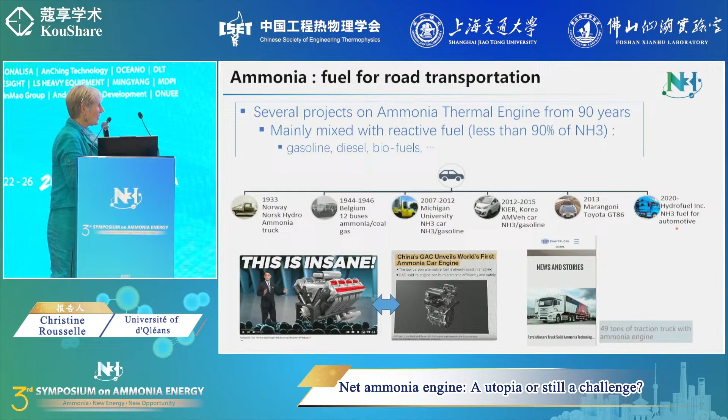I've seen also during the industrial academic workshop that there is a beautiful example for this joint research in order to develop 49 tons of traction trucks with ammonia engine. So it's still, we have still the idea perhaps to run vehicles with ammonia only.

Most of you know that from the announcement on the IMO roadmap in order to decarbonize the maritime sector, there is a lot of impressive work about ammonia marine engine. And in 2021, there is an example of what we can imagine for the future on the sea. The ships will be fueled with a different type of fuel like ethanol, LPG, methanol, hydrogen, LNG, biofuel, and ammonia.

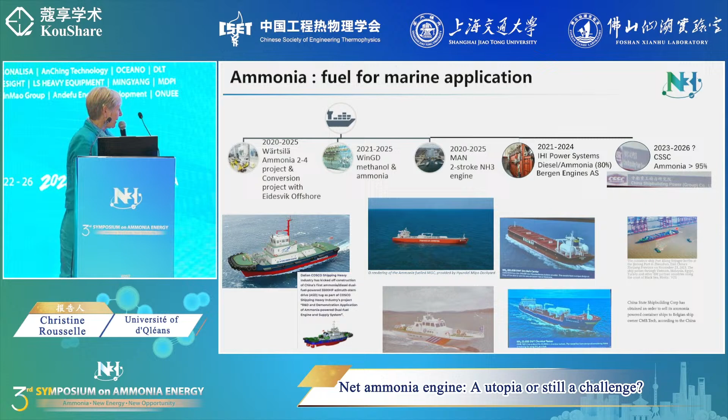So now there is plenty of industrial projects in order to develop marine ammonia engines. Wärtsilä, WinGD, MAN, IHI recently, and also Monday I listened to this new project with a CSSC manufacturer. So perhaps also we will see soon some ships with a marine engine fueled with ammonia.

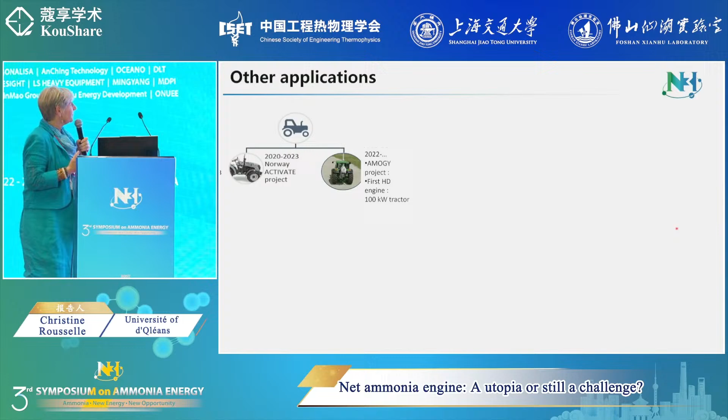There are some other applications like tractor. There are not so many. I know only two, one project between Norway and Poland. But also there are interesting new announcements about, for example, power trains with ammonia engines. So there is two examples.

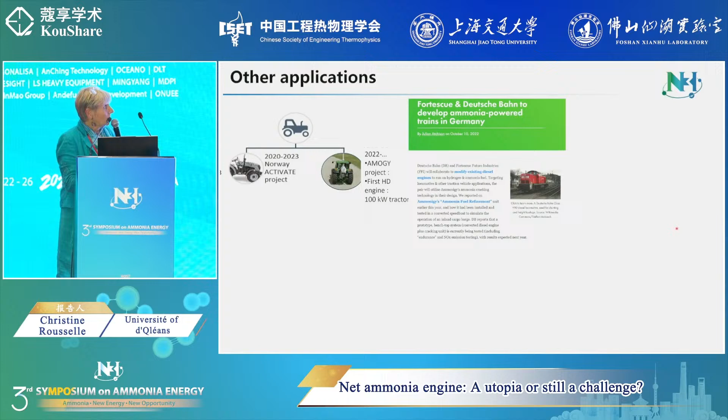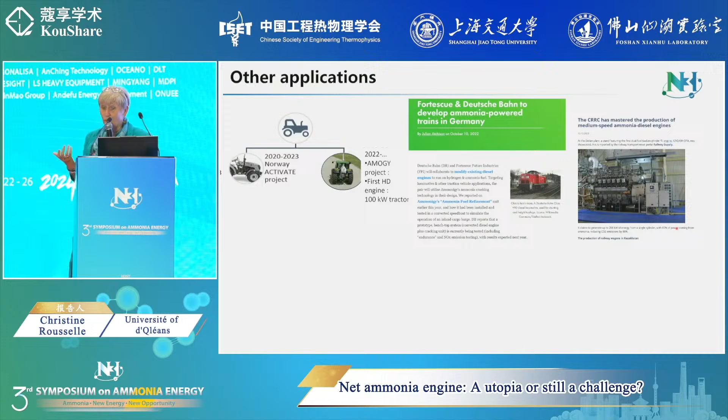Why? Because it is not possible to totally electrify trains everywhere on our planet. So there are other possible applications where there is engine like genset, auxiliary power unit, off-road vehicles like construction, mining, port, cranes, and so on. And I am confident that it could be a very nice and well-optimized application for ammonia engine.

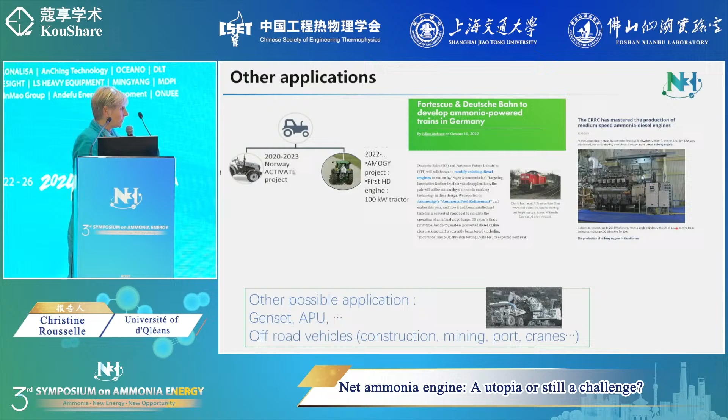We can dream, so why not for aircraft? And here there are also some projects, not a lot. There are some recent projects for a small company in Australia to develop an ammonia Falcon business engine. But also there is a big project with Boeing. It started at University of Florida, SWRI, and NASA about how we can use ammonia in engine.

Most of the time, in fact, they use ammonia as energy carrier and they will crack it on board.

Most of you, even if you are not in the combustion community, know that ammonia is not a good fuel, and it's not a good fuel for internal combustion engine. It is quite inert. The flammability limits are very narrow. It has a slow flame propagation. And also, it's a fuel-bound nitrogen, so we will have some trouble with pollutant emission.

So why do we want to use ammonia in engine? The question remains: is it possible or not possible?

In fact, we are going to the past. So during the 60s, there were several studies financed by the US Army in order to see the potential of ammonia as fuel.

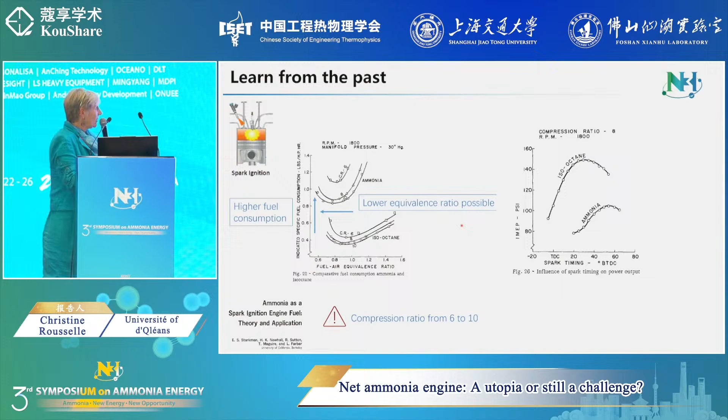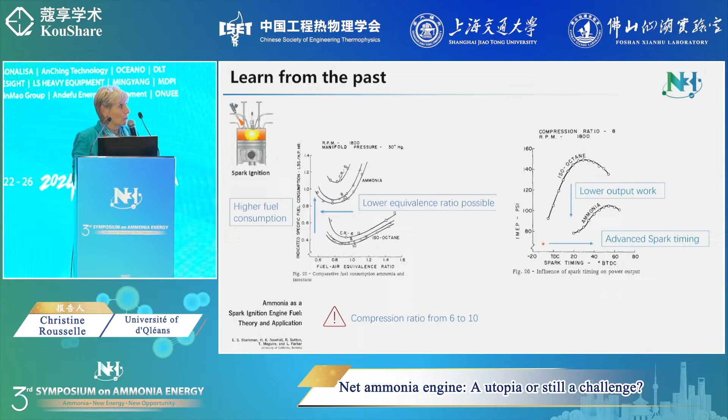If we look now on the energy output that we can have from the engines, unfortunately, the study showed lower output of work, higher fuel consumption, and also it needs advanced spark timing due to the low flame velocity.

Okay, what's about compression in an engine? Oh no, not yet, sorry.

So in fact, from this study, they conclude that we need to increase the spark energy, we need to increase compression ratio, engine supercharging, and hydrogen addition. So it was a long time ago already.

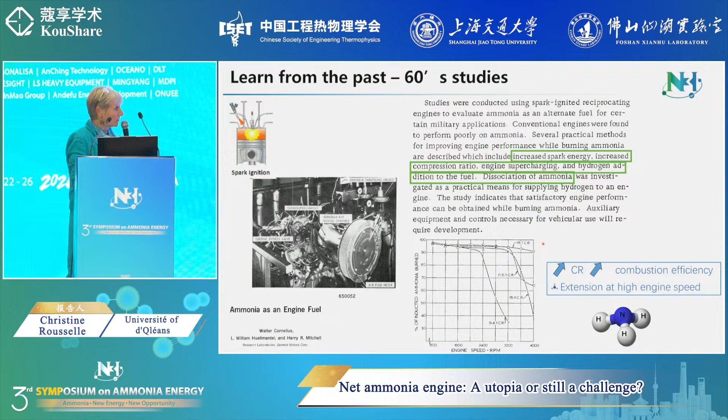And so finally, they said that, sure, we need to increase the compression ratio because we increase the combustion efficiency, and we can extend the use of ammonia at high engine speed.

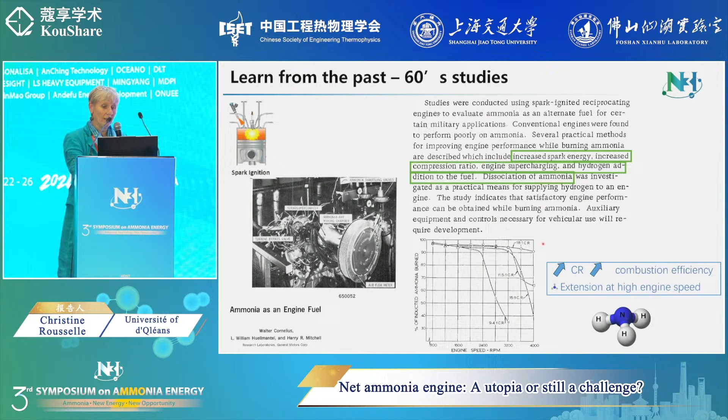So there is more recently a patent where they conclude exactly the same thing: we need hydrogen to assist ammonia.

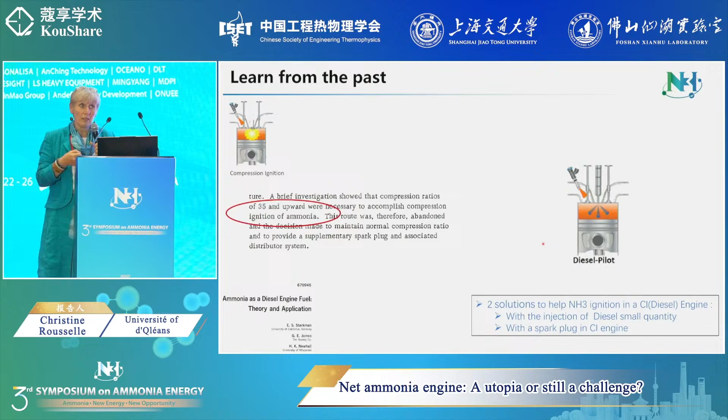About compression ignition engines, it was worse because we concluded that we need a compression ratio of 35 to obtain auto ignition of ammonia. So it's clear if we want to retrofit a diesel engine with ammonia, there aren't many solutions, but we need to do something, so we can use ignition by a small quantity of diesel pilot fuel, or add a spark plug in the diesel engine.

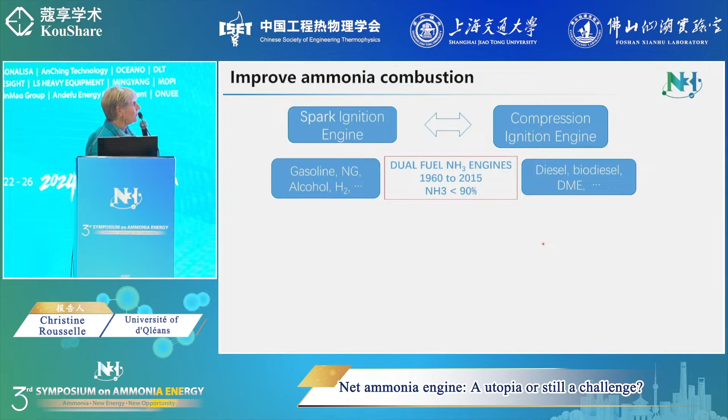If we look at what happened between the 60s and 2015, there wasn't much research, some vehicles, and what we can conclude is it was always a dual fuel engine. Most of the time, 50-50%, no more quantity of ammonia mixed with gasoline, natural gas, alcohol, hydrogen sometimes, but not a lot, diesel, biodiesel, DME, whatever we want.

We now have a good problem, a new problem: we want to reduce our carbon footprint as much as possible. So the question remains, how can we reach zero carbon footprint with an ammonia engine if we continue to use, in fact, hydrocarbon fuels?

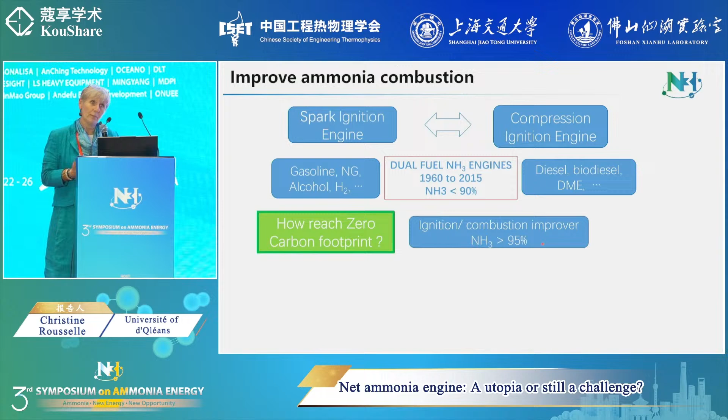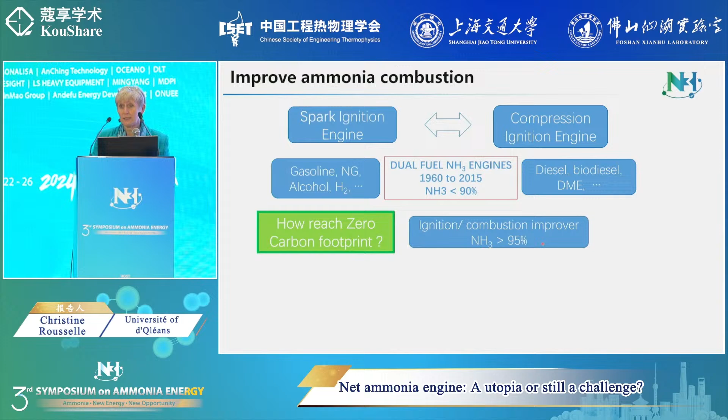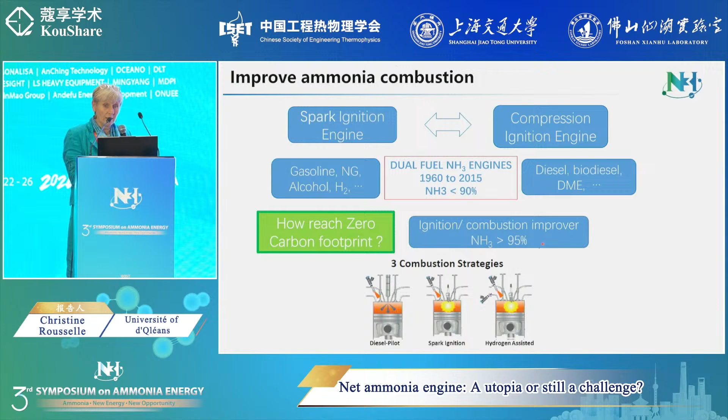Unfortunately, we know we need something, an ignition combustion improver. So I will consider mainly ammonia engines when we can use and guarantee operating conditions with at least 95% of ammonia. For that, we can use a classical spark ignition engine with high compression, hydrogen, and so on. Or we can use a diesel type engine, but we need a small pilot of diesel type fuel, or hydrogen, or spark plug additions.

So first we started with a current engine, with our partner Peugeot. We used a current spark ignition engine, but a single cylinder engine, gasoline direct injection, but using fully premixed ammonia-air. It was a very classical compression ratio, 10.5, so not very high. This is what happened when we started testing it.

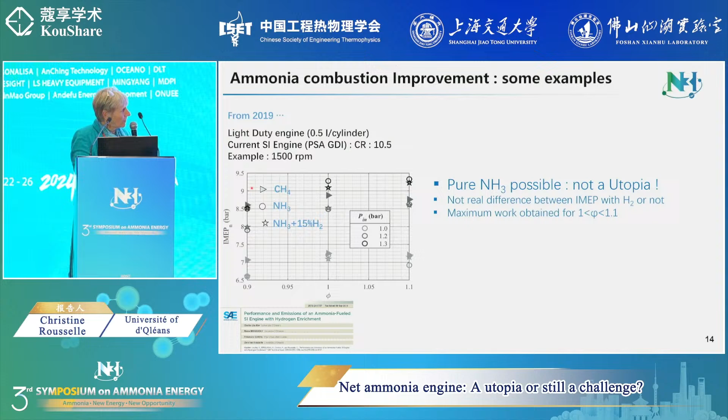I can say first that it is not really utopia to run with pure ammonia. But when I want to change the load and the engine speed, it's not the same story. We can see that in red, I cannot ignite, and I need to add hydrogen. There is no other way to do it.

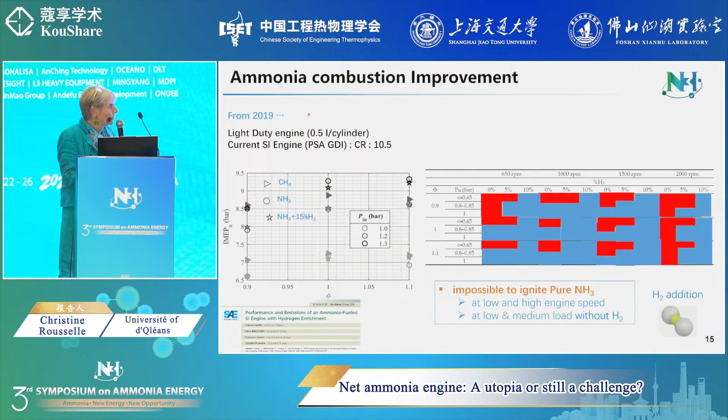But there are some new studies recently. When they use a higher compression ratio, 15, they try to see if it's possible to improve ammonia ignition only by using a very high efficiency ignition system device. For that, they use high current energy, for example a spark plug with high energy, or a spark plug with multiple sparks. We can see that with a high energy spark plug, we strongly increase the efficiency of the engine and can run with leaner conditions. They also changed the ignition system, the transistor coil, and also obtained an increase in efficiency.

Perhaps it's sufficient, and also they can run at a lower equivalence ratio, meaning not full load, but lower load.

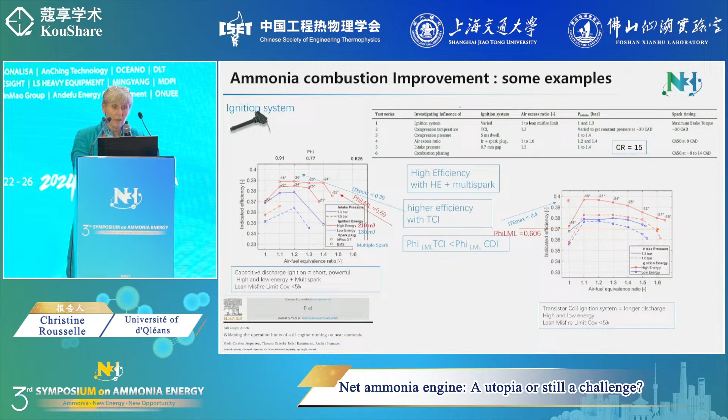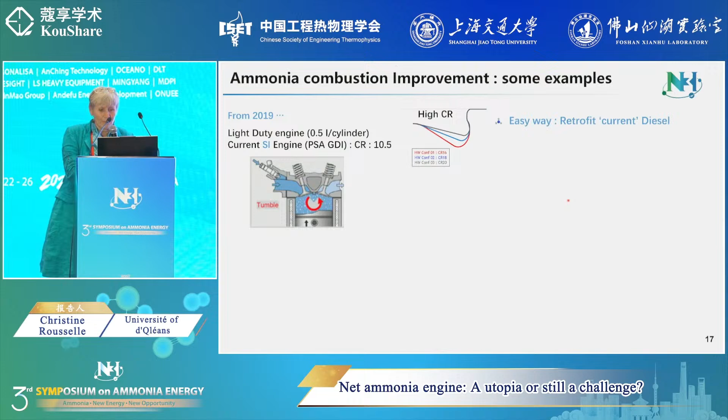We decided first to try to see what happens at different compression ratios, but unfortunately we only had a diesel engine. So the easy way is to use a diesel engine and add a spark plug. Most people here doing engine research say I am totally crazy, because we can see the difference between both engines. In a spark ignition engine, I have a flow that creates a lot of turbulence to enhance the flame and combustion development. In the diesel engine, I have a flow with nothing about turbulence, and normally it cannot work with a fuel like ammonia.

When I try to compare what happens with a spark ignition engine: we change the compression ratio a little, but that's not important here. What is important is that when I increase hydrogen content, I can run easily with a lot of stability at low load, which is very nice. That is my objective for the moment.

But when I use my diesel engine with a spark plug and change the compression ratio, I can reach really lower load. So, in fact, it is a success. This is totally strange, because the turbulence inside my combustion chamber is really not suited for fuel-air premixing. What I want to say is, be careful when we only use simulation, CFD modeling, and say 'okay, I have one engine like that, I replace gasoline by ammonia' - it's not the truth, because until now turbulent flame interaction in the case of ammonia is not well understood and cannot be well modeled.

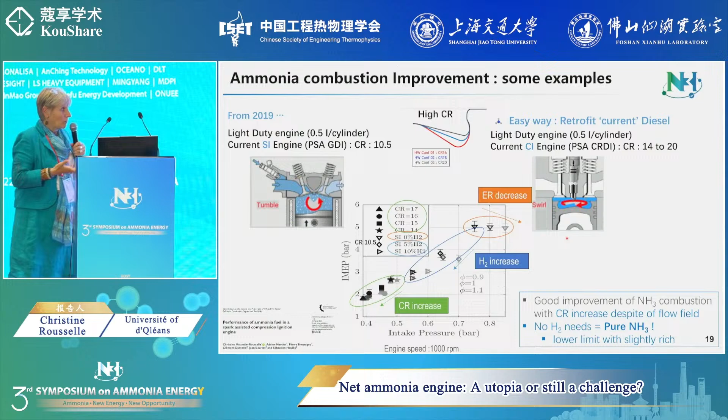So what we conclude is, in fact, yes, we don't need hydrogen. We need high compression ratio because we can reach a very lower limit without any problem. And this lower limit was similar to one study of Toyota when we enrich their engine with hydrogen.

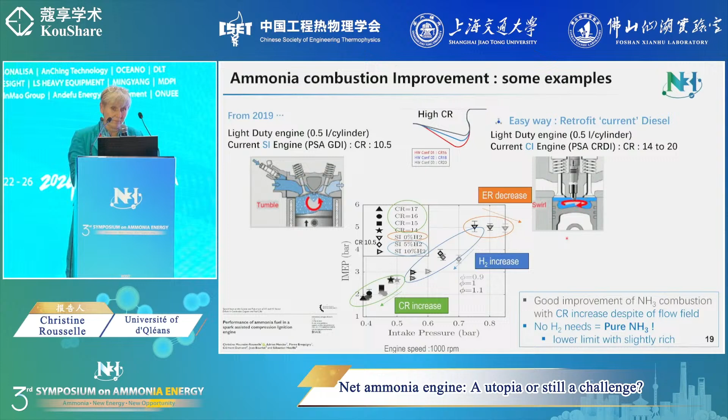Another way also is to improve the ignition system itself. So we did this by only using a high power igniter. And this high power igniter, in fact, the conclusion is that I don't need so high a compression ratio. I can limit it a little bit.

There is another way, the pre-chamber ignition. The pre-chamber ignition is also a good example of how we can improve the ignition of the engine because it provides higher ignition energy and increases locally the turbulence. And we can have less global hydrogen consumption if we fill the igniter with hydrogen.

But don't forget, my idea is to have only one fuel, which is ammonia. So how can we use a pre-chamber igniter with ammonia only? Which remains one open question.

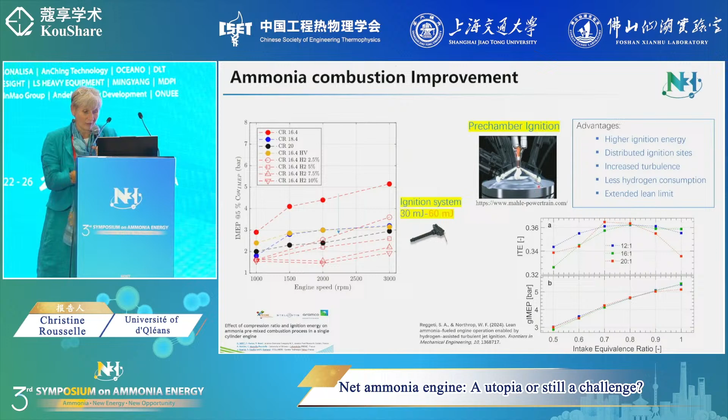So certainly I've convinced you that higher compression ratio, perhaps with some addition of hydrogen if we want to cover the full operating conditions, with optimized ignition, is the ideal solution.

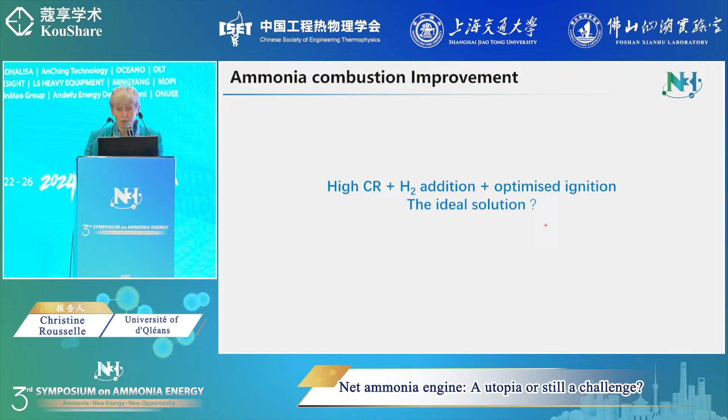But it is not so simple. In fact, some other problems remain, like how we will inject ammonia: gaseous or liquid ammonia injection. Gaseous could be nice, but for that we also need a vaporizer.

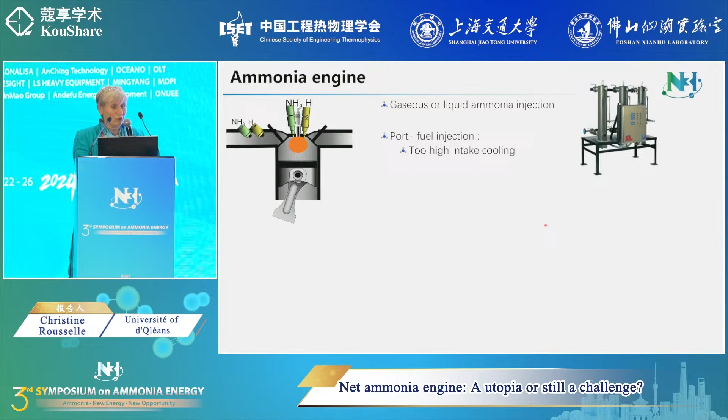So we have also another material issue, which is always not so easy to control. We can have port fuel injection, but we will have high intake cooling due to the vaporization heat for ammonia, or we can use direct injection. This increases the volumetric efficiency, with no air displacement or intake mixture cooling.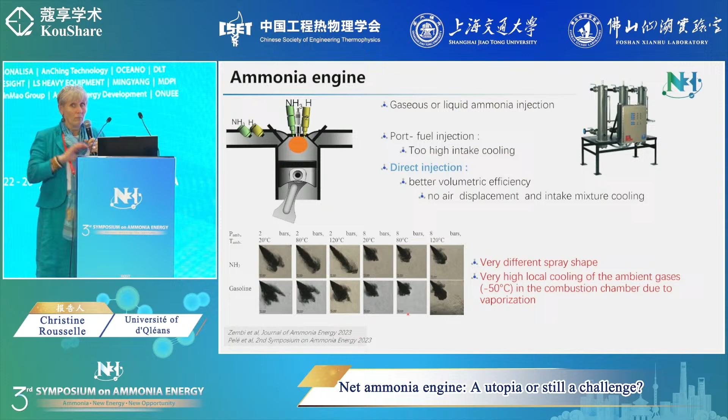Sure, it looks nice, but if I compare, in fact, ammonia spray to gasoline spray using the same injector, which was not developed for ammonia, it's true it works for gasoline, but there is a different spray shape, different atomization behavior, and also very high local cooling of the ambient gases, minus 50 degrees Celsius, in the combustion chamber due to the vaporization of ammonia.

This could be nice if we consider NOx emissions, but it will depend on when it happens during the cycle.

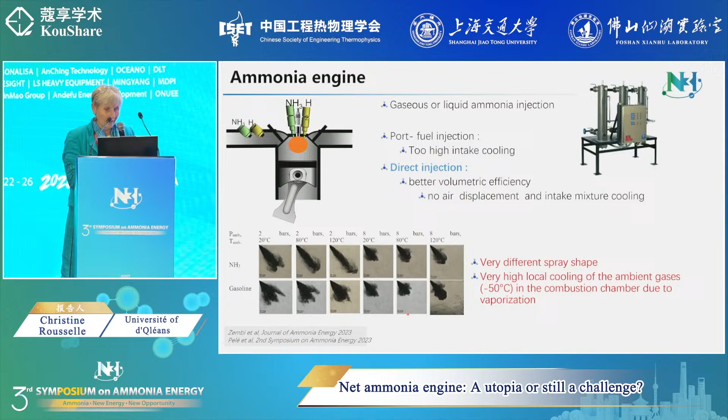I've seen that this company developed its own injector, which is very important. On this, I'm sure that we have to do it.

And the question remains: to do liquid ammonia injection for engines is feasible, but we have to optimize again all the injection strategy, as we did in the past with classical hydrocarbon fuel. We need to improve the injector. We need to improve the injection pump with material compatibility and safety in mind.

Okay, what about the hydrogen addition? Hydrogen addition is sure good because hydrogen is a zero carbon fuel, but it is not very nice for safety and for the overall global overview of the engine itself.

We need another tank. So the idea is to use an onboard reformer and to use a partially cracked ammonia mixture. Just before me, the professor showed that they succeeded in doing it at a very low temperature, only 450 degrees Celsius if I remember. And this is very nice.

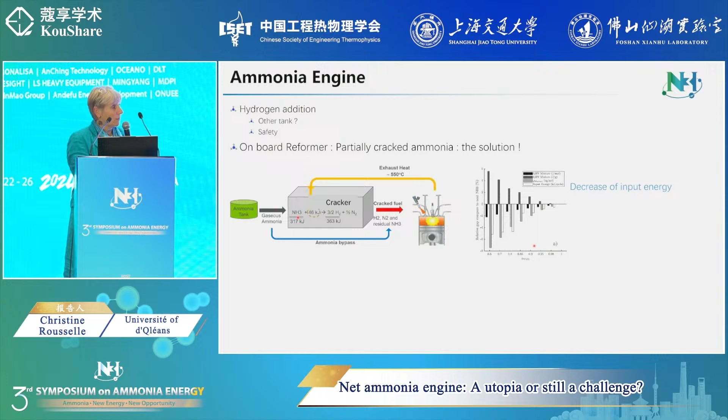But when we calculate the input energy, as we add the mixture of partially cracked ammonia as a function of the cracking ratio quantity - so this is full 100% ammonia, and here we cracked a little bit - in fact, we decrease the input energy, shown in white. The consequence is sure we will also decrease the energy output, so we need more fuel.

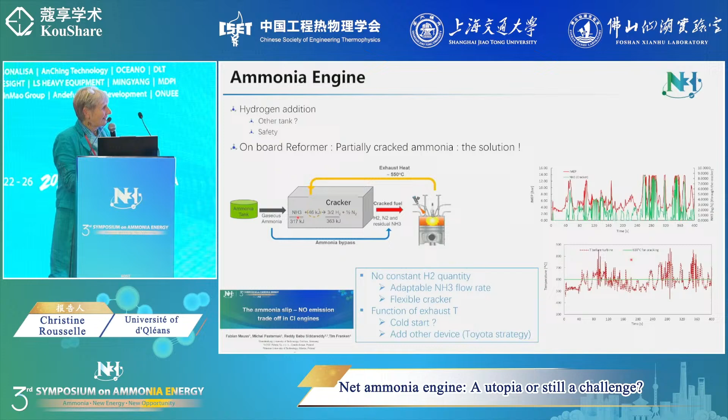Moreover, I presented on Tuesday some recent work from Fabian Mauss, using a stirred reactor model, showing that if we want to accomplish the European standard driving cycle for personal cars, it means we need an ammonia flow rate at the reformer between... I cannot see the value, around 2000.

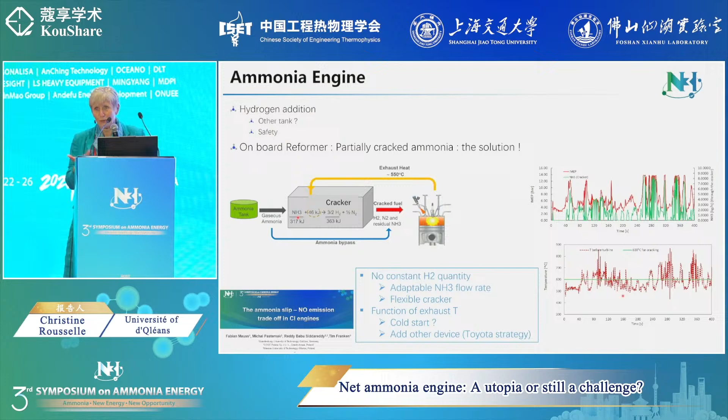That quantity is really important, but it is not only this. It is important that we have a flexible cracker where we can change the ammonia quantity at the input, to guarantee the operating conditions of the engine and to avoid bad emissions. From the study, they show that it needs 600 degrees Celsius for cracking, but unfortunately, it will not be the case.

Okay, but it is not only a question of performance. It is also a question of pollutant emissions. So ammonia, it's a zero carbon fuel, so we can imagine that everything is perfect. If we compare with a fossil fuel, we know that there are several pollutants that we don't like, and also we can see their impact on global warming. It's easy: CO2 plus N2O, black carbon, SO2, VOC, NOx, NH3, PM pollutant, and also we can have some trouble with the ozone layer.

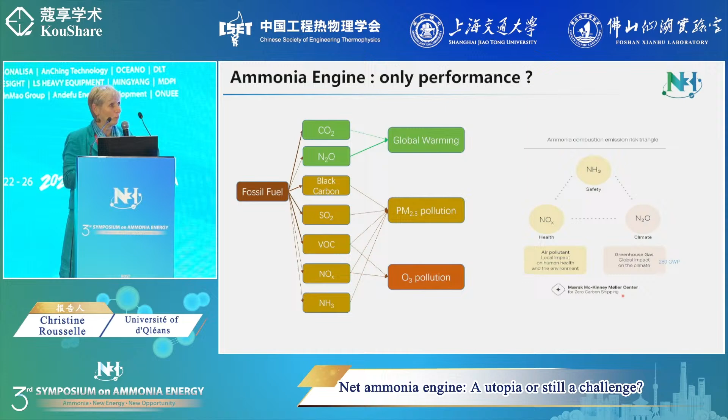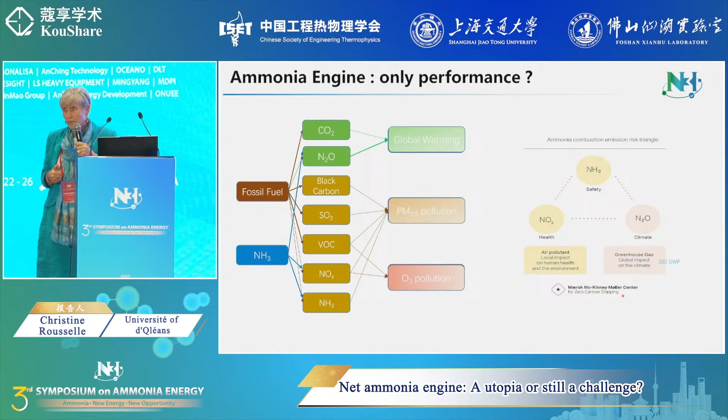What about ammonia engine? Unfortunately, there is what we call the ammonia combustion emission risk triangle. We have to compete between three problems: unburned ammonia, which is a very high toxic molecule, NOx, which is not good for health, and N2O, which has about 300 times the global warming importance.

What we know from gasoline is that it was only thermal NOx, and for ammonia, it's thermal NOx plus fuel NOx. If we look at some old kinetics mechanisms that take into account fuel NOx, we can see that fuel NOx can be produced at lower temperature than thermal NOx. So we don't know what will happen with ammonia.

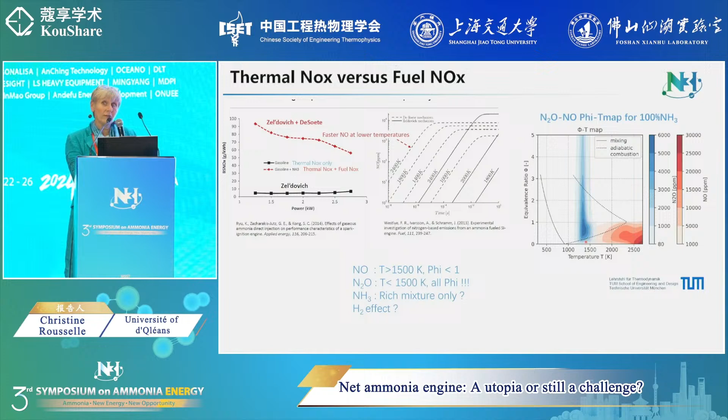So what could be the effect of hydrogen addition in order to mitigate this pollutant? Recent studies show that when we go from lean mixture to rich mixture, as expected, I have more unburned ammonia in rich mixture, but I can also have unburned ammonia in lean mixture due to instability of the engine. And also here, I have one quantity of ammonia which is not zero, mainly due to the crevice problem where we burn ammonia later during the cycle.

About NOx, it's quite similar to what we imagine - we produce mainly NOx in lean mixture. About N2O, there's some good news: N2O remains very low, in most cases lower than 100 ppm.

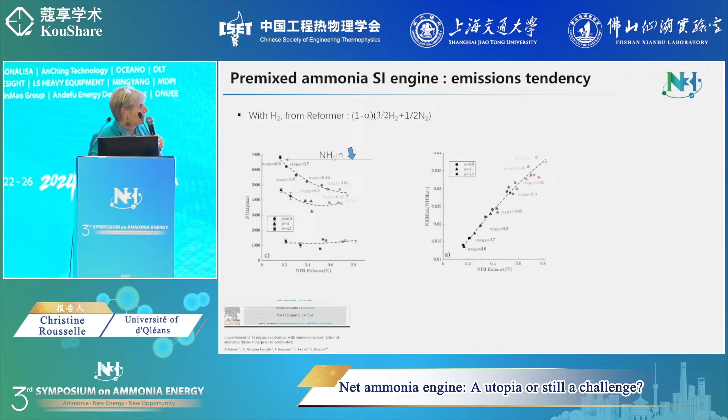So we also tried to see what happens when we use partially cracked ammonia, by adding H2 and N2. What we can see: here we have ammonia at the exhaust and NOx. For example, starting at 100% ammonia and increasing the quantity of cracked ammonia, we decrease ammonia at the exhaust, but we increase NOx. Even if we have less fuel NOx, it increases due to the presence of more hydrogen. The decrease of ammonia is due to the fact that we burn the ammonia content better, even considering the real ratio between ammonia at the exhaust compared to ammonia put at the intake.

What about some other pollutants we never talk about? Many companies told me, 'Christine, there's no regulation about hydrogen at the exhaust,' and it's true, there's no regulation. But when you use ammonia in an engine, depending on operating conditions, we can have hydrogen at the exhaust - not a small quantity, it could be up to 2% at the exhaust. 2% could be the same level as ammonia at the exhaust. It's not the same problem though - hydrogen is not toxic, but for safety reasons, it's still not good to have it.

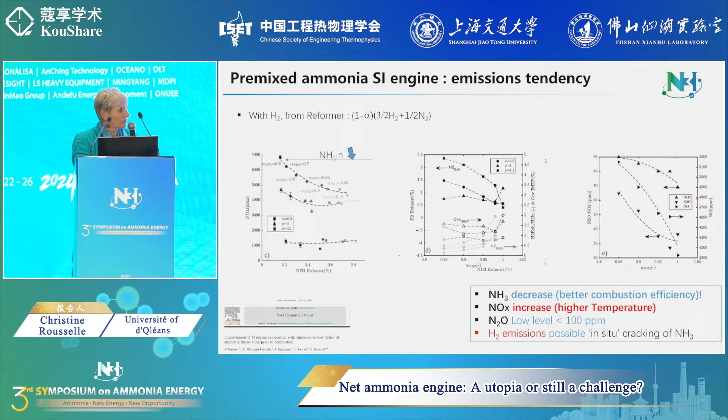Okay, the easiest way is to think about after exhaust post-treatment. Most people think selective catalytic reactor is the solution, and it's already done because it exists for diesel engines. True, it's one way to remove NOx. But it is not mature for ammonia engines.

The first idea was to say, as we produce unburned ammonia and NOx in the exhaust, we don't need to add ammonia in the exhaust like we add urea. It could be true if we can control the NOx to NH3 ratio as a function of the operating conditions.

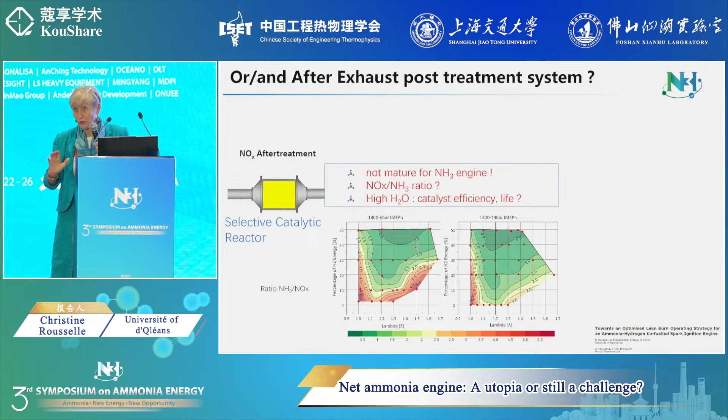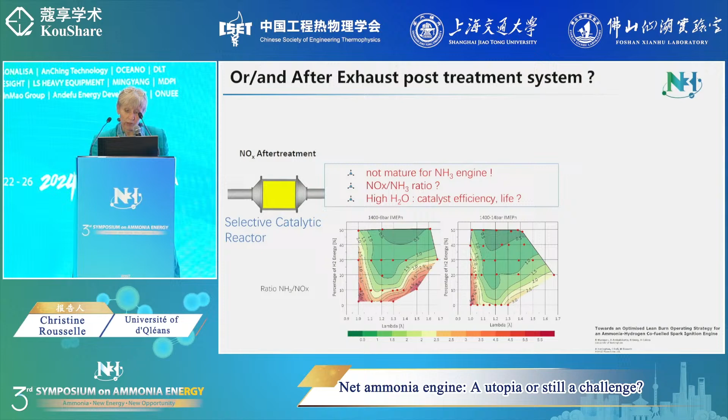My colleague from the University of Nottingham tried to see how it's possible to optimize the ammonia-NOx ratio in order to guarantee the proper working of the SCR. For that, they adjust the hydrogen content in the ammonia to see how it's possible to regulate unburned ammonia and NOx at the exhaust as a function of the quantity of hydrogen added at the intake. This could be a real nice control of the emissions at the exhaust, so hydrogen could also be one way to optimize SCR efficiency.

Before I conclude, I cannot forget ammonia compression ignition engines without a spark plug. So I decided to show you a recent study done in the US.

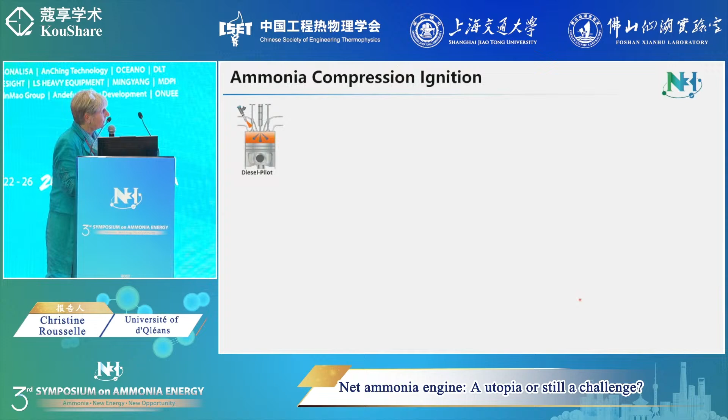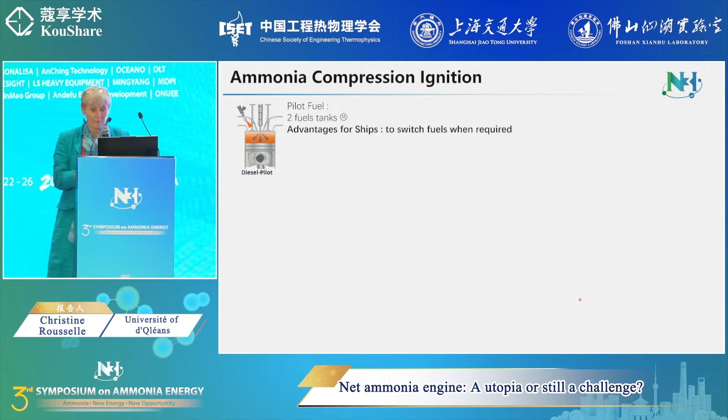Why? Because using a pilot fuel is not ideal since we will have some CO2, but on the other end, it could be very useful because in many ships it's usual to have several tanks with different fuel. We also don't know where in the future we can easily get ammonia in different ports, so perhaps ships will have to change fuel depending on their trip. Having two tanks is not a problem for ships.

So we have different strategies to ignite ammonia with a small quantity of diesel, as a function of the diesel injection itself during the cycle. For that, they consider that the ammonia-air charge is already fully premixed, so they adjust only the injection of diesel.

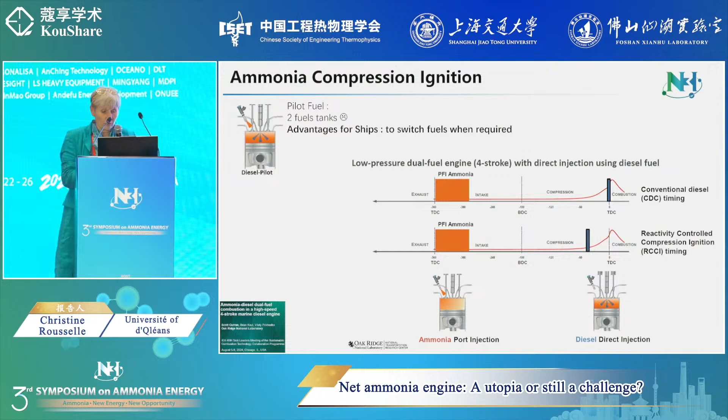I present something where they inject very late, like in a classical diesel engine. Looking at the operating condition map, energy output as a function of engine speed, we can see they can replace at least 95% of the fuel by ammonia, especially at full load. Unfortunately, it remains difficult at low load, where they cannot reach a very high replacement, but they guarantee at least 50% ammonia replacement.

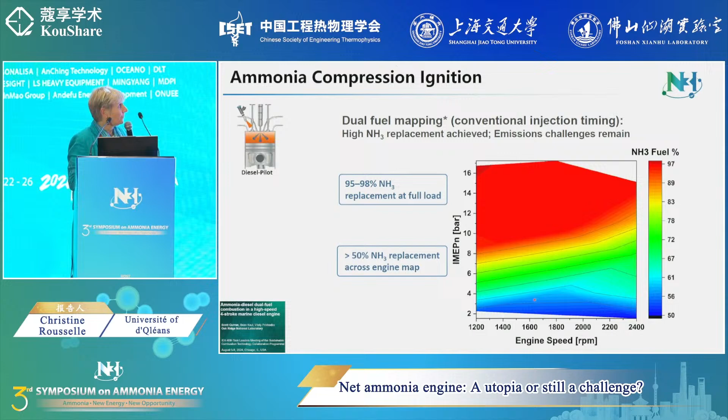Why I want to show you that is about the emissions. If we look at emissions when we are at full load with more than 95% ammonia, for the two cases, NO is very high in comparison to classical diesel combustion mode, and unburned ammonia is also a problem.

But if we look at N2O, we can see it's finally not so high when we are at full load. Don't forget that N2O has roughly 300 times more GWP CO2 equivalent. So when we want to compare classical fuel with ammonia engine, if we transform N2O emissions into equivalent CO2, this is what happens.

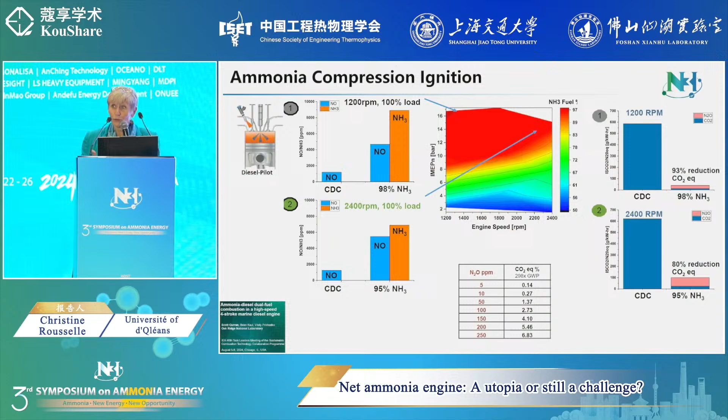Finally, they can reach more than 80% reduction of CO2, even if the quantity of ammonia is more than 95%. So my conclusion: can we run ammonia with only ammonia? I will say yes.

Can we have a very clean 100% ammonia engine? Yes, but it is not so easy. We need to resolve a lot of challenges—technical, but also scientific.

And after, I have no time, but there is so much other scientific challenge about lubricity, materials compatibility, and safety. Last, I don't forget that most of these experiments have been done for light duty and small heavy duty engines, but most of the time never with the large engines that we have in ships.

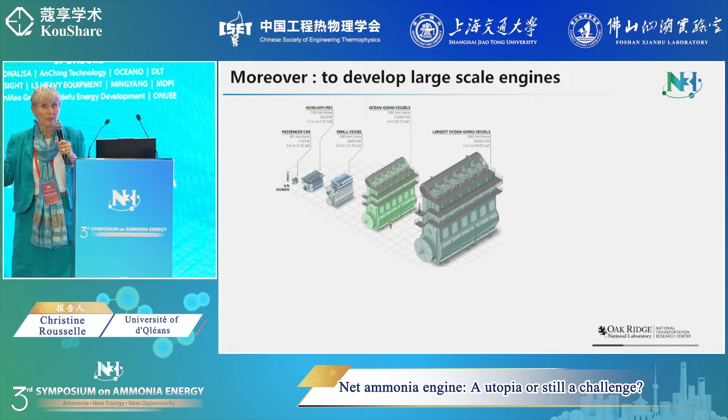So many people can say we don't need your work. It's not true, because if we want to develop very accurate models, we need experimental data for at least a small scale before applying it to all larger scale engines. Thank you.

Let's go and enjoy the cruise. See you.